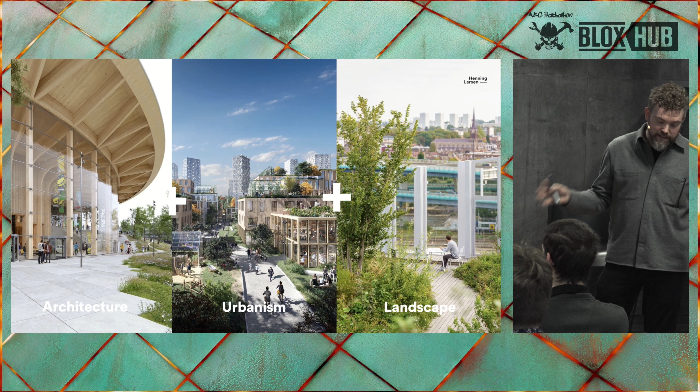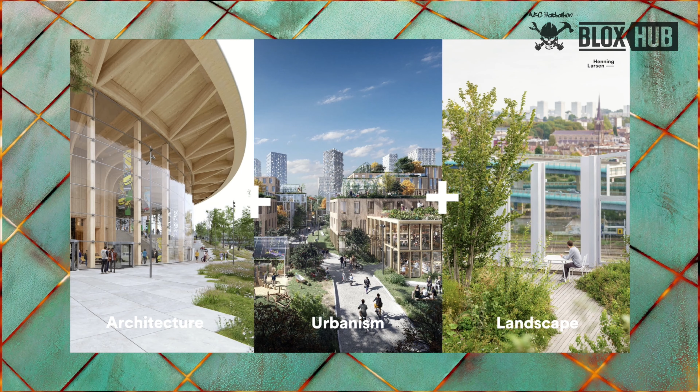As architects at Henning Larsen, we always work with different scales. Of course, we're mainly architects, but we also work with urbanism, giving buildings more value by looking at them in a larger context, and landscape, which became a big part of this building as well. The location led us into bringing landscape and city together, and that merge was a big part of the inspiration.

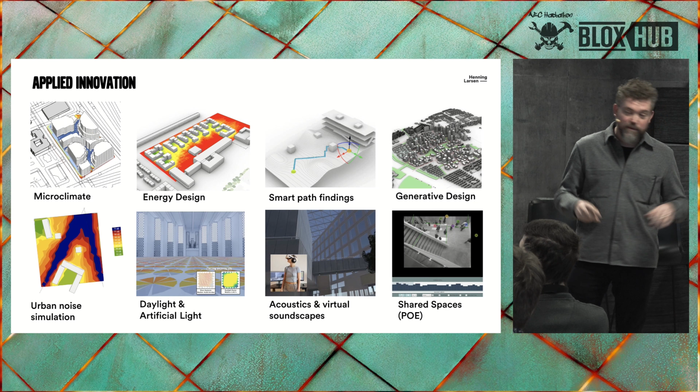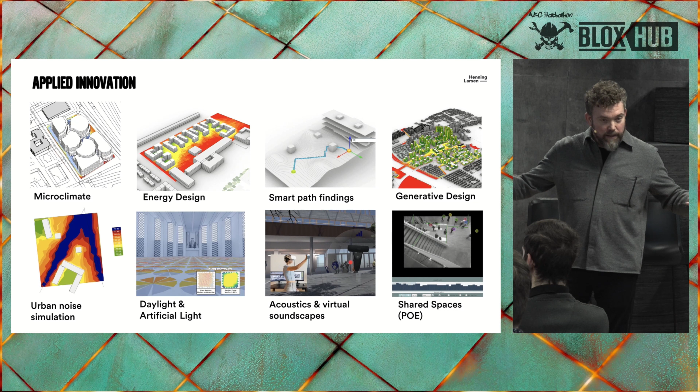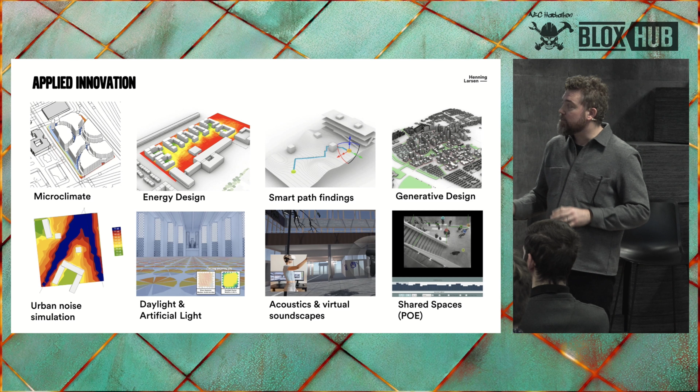When it comes to digitalization, which is a big part of what we're talking about today, we worked with a lot of different tools. This was part of the tools we used initially, very early on, to study how the building should work and its placement. It's about microclimate, looking at what could be potentially good outdoor areas for people to hang out in. It's about paths and circulation on the site and connection to the surrounding conditions—there's a lot of noise, it's right up against a freeway. So there were a lot of these studies that we did with the engineers on our team.

And of course we collect and analyze data that could then lead us into the more design-related questions. We always, as architects, work in a holistic approach when it comes to technology and data collection, with sustainability as an overall objective in everything we do, and we always try to strive for the best type of design.

Going into the project, when it comes to the landmark aspect, it relates to the brand—it needed to be round. The location also seemed like the right choice.

We have a lot of different sort of surroundings. We have a freeway on one side, a river on the other side. So there's a lot of reasons why we did it round as well.

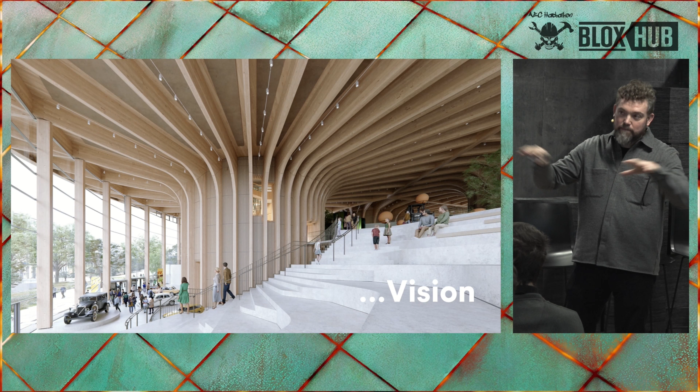Going from that idea to the actual build is of course super complex. I think Stefan will cover the manufacturing part after me, but it's a very complex wooden structure derived from those initial thoughts about a journey through the project—the vision of the big landscape with the wooden pavilion sitting in it, and the experience of what you feel within that structure and on the landscape.

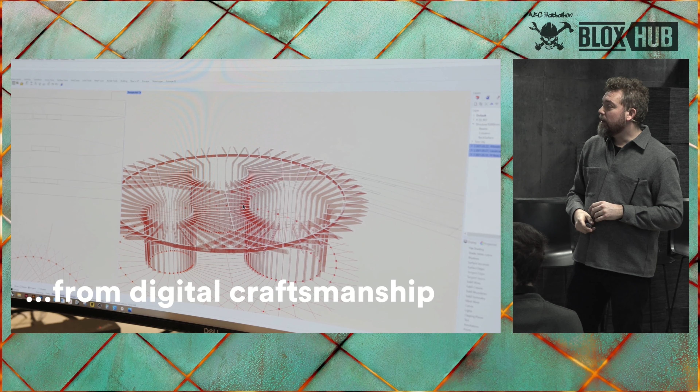It was really about a lot of digital craftsmanship—we worked with Grasshopper and Rhino mostly as tools, developing the geometry, which derives from a perfect circle, and the circles come from a wish from the client to have some exhibition functions as black box spaces without daylight.

Those boxes were shaped according to the client's demands for the sizes of those functions, and the structure derived from those circles, their shapes, and the client's requirements.

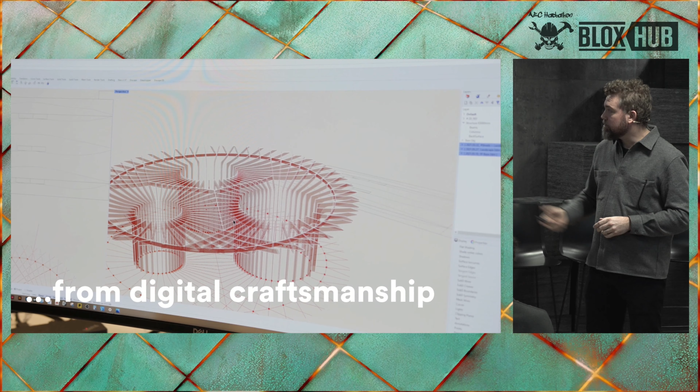It's a complex geometry where we worked very closely with Wiehag, who was selected together with Linna, who did the project management for their part. When they were selected as structural engineer plus manufacturer of the wood structure, we worked closely with them figuring out the dimensions.

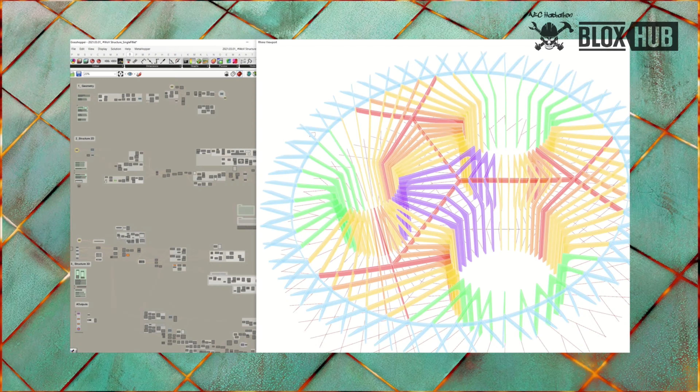These are the most massive ones—1.2 meters high, 1.8 meters high, and 600 millimeters wide. So it's huge, massive beams that span. The longest spans are probably here—55 to 60 meters without support.

With these mathematical scripts, it's easy to work with the engineers and adjust the amount of beams and structure needed for support, and easily test out what that does with the architecture and the room inside, finding the correct balance.

Up to when we see the final prototypes—my colleague Philip here fell in love at first sight when we saw the first prototypes of these massive beams and the connectors. This is from the build site, about a year ago, I think. Stefan has more updated pictures of the build site.

It's been a fantastic process to see this from those early sketches and watch how that structure comes alive and creates rooms underneath it.

Programming-wise, just shortly before my time is out—it's a huge program for Volvo. They wanted a vehicle handover area where customers can come and pick up a truck, a bus, and a car. It's a big exhibition, of course, which is the main focus, but also a lot of events, event halls, and conference facilities—all kinds of meeting facilities that support both them and their outreach to society and the community around it.